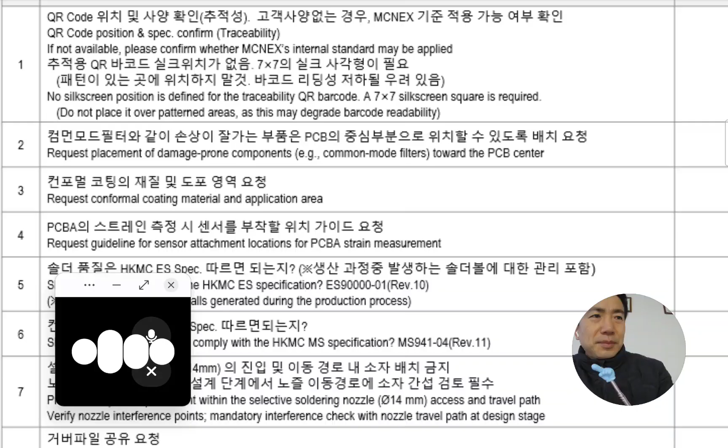Very natural, David. One small correction in your introduction too - you said 'nice to meet you', but for a broadcast opening native speakers usually say 'good to see you again'. Example opening: hello everyone, this is David speaking, good to see you again, today is March 5th and today is payday. Very clear and natural. If you want, we can also practice a 30-second YouTube style opening speech together, it will be great speaking practice for you.

Oh my God, GPT, I didn't know about that. Okay, you mean I could say today is a payday, today is the payday? GPT, could I add the article 'the' in front of payday? I mean, could I say today is the payday, or based on your suggestion, today is payday?

David, great question, this is exactly the kind of detail that makes your English sound natural. Let's go slowly. First, the most natural sentence is simply: today is payday, no article, no 'a', no 'the'. Native speakers usually treat payday like a special day name, similar to today is Monday, today is Christmas, today is payday. So the best expression is today is payday.

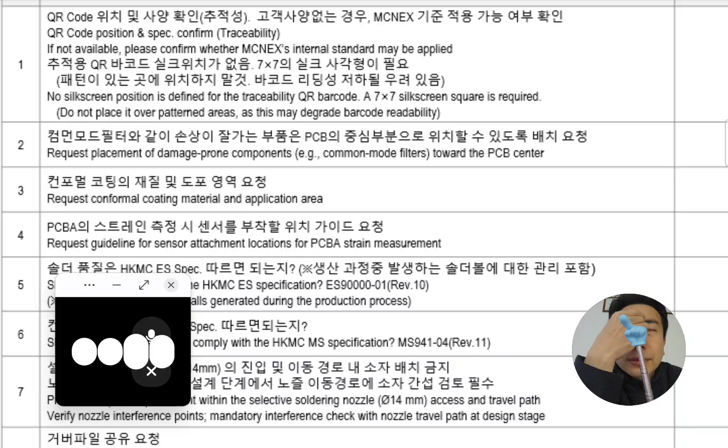Now let's look at the other options you asked about. Today is a payday - this sounds unnatural in normal conversation, people almost never say this. Today is the payday - this is grammatically possible, but we use it only when we are talking about a specific payday we already mentioned. Example: our company pays employees on the 5th of every month, so today is the payday. But even in that case, many native speakers would still simply say today is payday. So remember this simple rule, David: today is payday - best and most natural. Today is a payday - uncommon. Today is the payday - possible but uncommon.

Now let me help you with a very natural speaking version for your video opening. You could say: hello everyone, this is David speaking, today is March 5th and today is payday. Or a more casual one: hello everyone, today is March 5th and guess what, today is payday.

By the way, David, small pronunciation tip for speaking practice: payday, payday, say it slowly, pay-day. Example sentence to practice: today is payday, so I'm in a good mood. If you want, we can also learn three more very common expressions people say on payday in English - they are very natural and useful in real conversation.

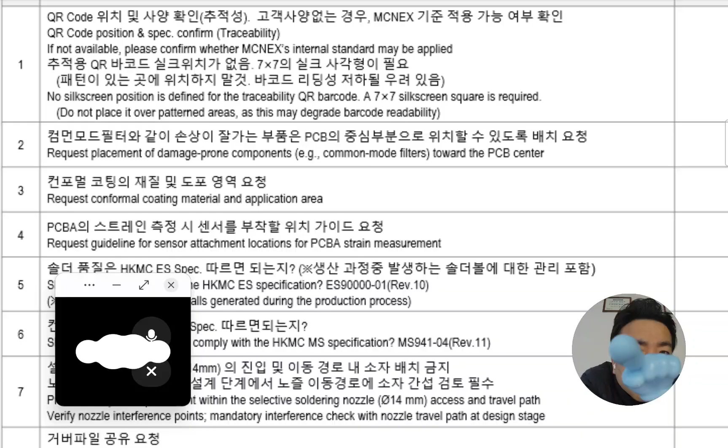GPT, okay, I got the point. I got the point.

You know what, yesterday I heard about our company's atmosphere these days - bad mood these days. Like I said, there was a bad human resource restructuring last month. So the atmosphere of my office is very bad.

Luckily, I survived, but I feel very sorry for the someone who left last month. I felt very sorry about that, sorry about them.

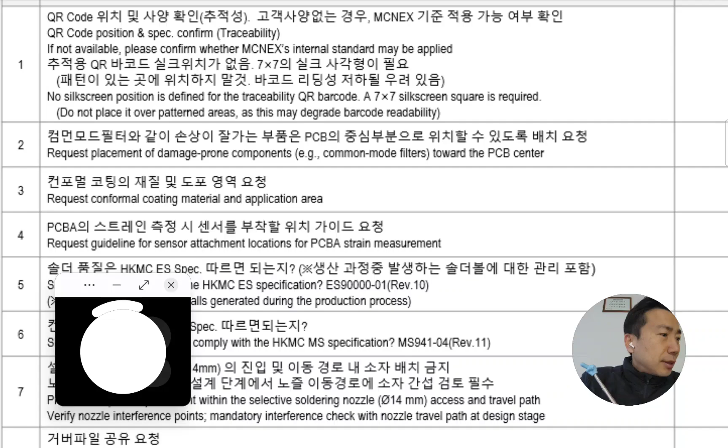David, I understand what you're trying to say. Situations like restructuring can make the office atmosphere heavy. It's normal to feel relieved that you stayed, but also sad for colleagues who had to leave. Your feeling is very natural.

Let me help you say this more naturally in English. First, your idea was very clear, but we can polish it a little. You said, 'I feel very sorry for the someone who left at last month.' A more natural way would be, 'I feel very sorry for the colleagues who had to leave last month.' Or, 'I feel sorry for the people who lost their jobs last month.' Another very natural expression people use is, 'My office atmosphere has been a bit tense lately because of the restructuring.'

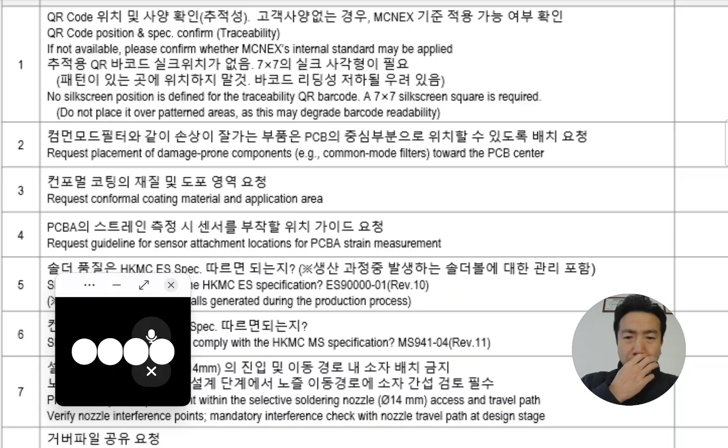Let me show you a clean and natural version of what you were trying to say. Try reading this slowly: 'Recently, the atmosphere in my office has not been very good. Our company went through some restructuring last month, and several colleagues had to leave. Luckily, I survived, but I feel very sorry for the people who lost their jobs.' This sounds very natural and professional English.

One small improvement from what you said. Instead of 'bad mood atmosphere,' native speakers usually say, 'the atmosphere is tense,' 'the mood in the office is heavy,' or 'the atmosphere is not very good.'

David, if you like, we can also practice something very useful for your workplace English: how to explain company restructuring clearly in meetings or conversations. For example, phrases like 'the company is going through a restructuring,' 'the organization is being reorganized,' or 'there has been a workforce reduction.' These expressions are very common in global companies.

Sorry, I'm having issues right now. Could not understand what you said. I didn't say anything. That must have been kind of a technical glitch. That happens all the time.

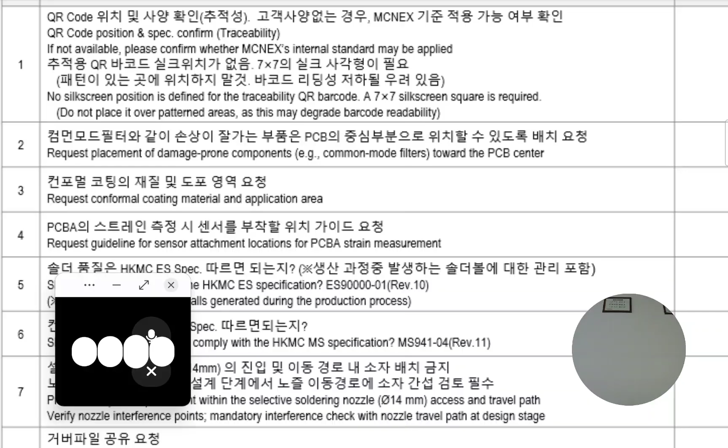David, I'm following you. I like how you explain the situation like a presenter speaking to an audience. That's very good practice. Let's polish the English a little so it sounds clearer and more professional. First, a small correction to your explanation. You said, 'I removed the subject to make the sentence short.' In documents or slide titles, that is very common. Many technical slides remove the subject. For example, in presentations, people write 'confirm test conditions,' 'review design changes,' 'request coating material information.' So your idea is correct.

Now let's look carefully at your sentence: 'Request the compromised coding material and application area.' There are two small issues. 'Compromised coding material' sounds unusual in English. The meaning is a little unclear.

I think what you may want to say is one of these. Option 1, most likely meaning: 'Request the conformal coating material and application area.' In electronics/PCBA manufacturing, conformal coating is very common. Maybe this is what you mean, asking the supplier or team to provide information about the coating material and where it will be applied. Option 2, if you mean agreement decision: 'Request the agreed coating material and application area,' meaning please confirm which coating material was agreed and where it will be applied.

Now, let me show you how this would sound in spoken English during a presentation. You could say, 'First, we request confirmation of the coating material and the application area.' Or a little more detailed, 'We would like to request the coating material specification and the application area.'

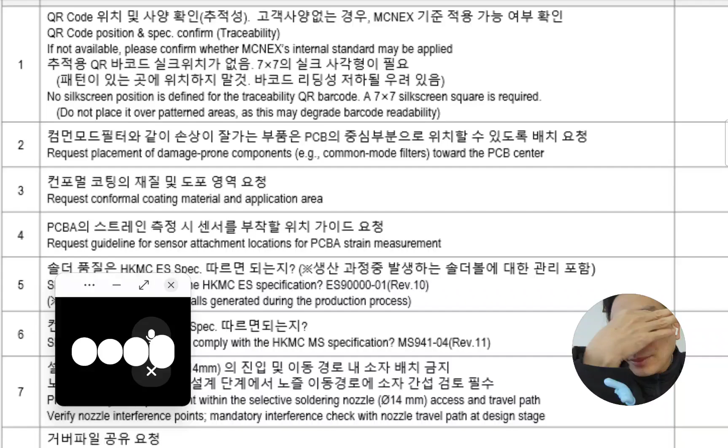David, you're doing exactly the right thing, repeating the sentence until it becomes muscle memory. That is a very powerful way to improve speaking. Let's polish a few parts so your presentation sounds natural and professional, especially for a technical meeting. Your opening sentence, you said 'people, we proceed to the detailed discussion.' In English meetings, 'people' sounds a little unusual. Native speakers usually say, before we proceed to the detailed discussion, before we move on to the detailed discussion.

So a polished version would be: before we proceed to the detailed discussion, I would like to explain this agenda item. Here is a very natural version for meetings: before we proceed to the detailed discussion, I would like to explain this agenda item. We are requesting confirmation of the coating material and the application area. This sounds clear and professional.

Your question about 'receive the coating' — good instinct, David, your feeling is correct. In engineering English, 'receive the coating' is understandable, but not the most natural. Better expressions are 'be coated' (best), 'have coating applied,' or 'require coating.'

Best technical sentence: your new sentence is very good. Which parts of the PCB or product will be coated? This is perfect engineering English. For example: it is requested to clarify two things, which coating material will be used, and which parts of the PCB will be coated. Very natural.

Even more professional, in automotive electronics meetings you might also hear: which areas of the PCB will be coated, or which components require conformal coating. These are very common phrases in PCBA design reviews.

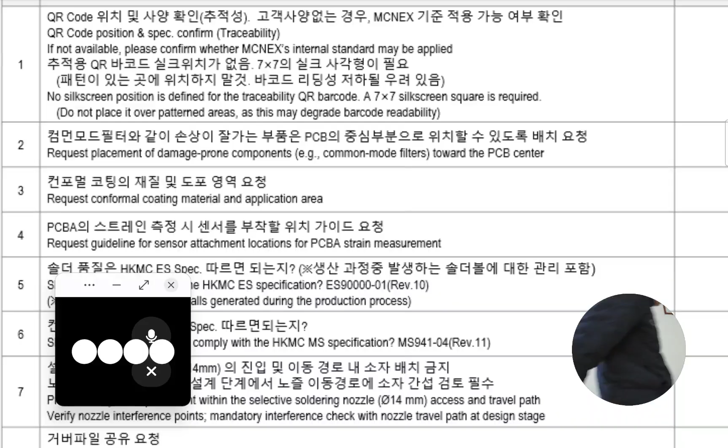Conformal coating is a protective layer applied to the PCB to protect electronic components from moisture, dust, and corrosion. In practical terms, it helps prevent electrical short circuits and leakage currents caused by environmental contamination. Speak slowly like this.

This sounds very professional. If you want a slightly more technical explanation, engineers often say: conformal coating protects sensitive electronic components from environmental factors such as moisture, dust, and chemical contamination, which can lead to short circuits or corrosion. This would sound very natural in an automotive electronics design review, your full presentation version.

David, try repeating this version.

Before we proceed to the detailed discussion, I would like to explain this agenda item. We are requesting confirmation of the conformal coating material and the application area. Conformal coating is a protective layer applied to the PCB to protect electronic components from moisture, dust, and corrosion. In practical terms, it helps prevent electrical short circuits and leakage currents caused by contamination.

That would sound very clear in a meeting.

One more useful phrase for your PCBA design review meetings. Engineers often say 'to improve reliability in harsh environments.' For example: conformal coating is applied to improve PCB reliability in harsh environments. This is very common in automotive electronics, especially for cameras exposed to humidity and temperature changes.

David, one small curiosity from a manufacturing perspective. In your production line, is the conformal coating usually applied by selective coating machine or manual spray coating? Both methods are common in automotive PCBA lines, and it's a good topic for English discussion too.

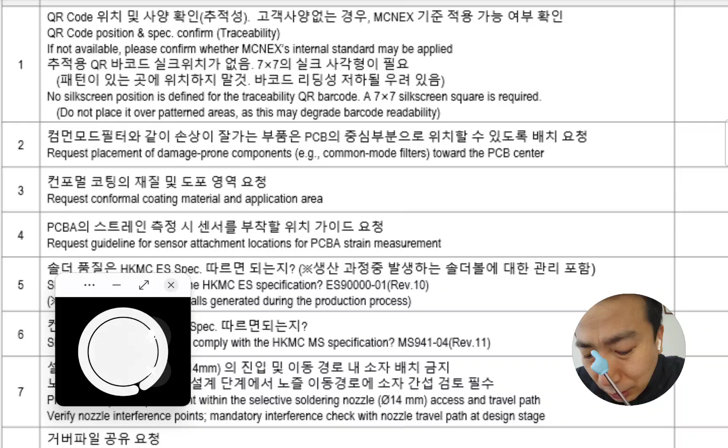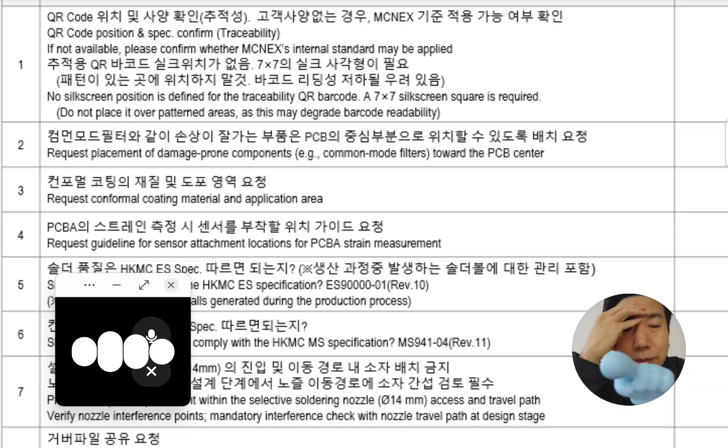David, you explained the situation very clearly. I understand what you mean. In manufacturing, especially in electronics and PCBA processes, there are several natural English words for that concept. Let's go step by step. First, the most common and natural word engineers use is contamination. This is exactly what you already used in your sentence, and it is very correct in technical English. Contamination means unwanted substances that get onto the product during manufacturing or handling. For example, dust, particles, oil from human hands, solder residue, small foreign particles. Engineers often say environmental contamination or particle contamination.

Another very common word is foreign material or foreign particles. These mean materials that should not be there. Example: foreign particles on the PCB may cause electrical shorts. A very simple expression is debris. This usually means small unwanted particles left after processing. Example: dust or debris may remain on the PCB surface. In many factories, people also say contaminants. Example: conformal coating helps protect the PCB from moisture and contaminants.

Now let me show you how you could explain this very naturally in your presentation. You could say: in manufacturing, contamination such as dust, particles, or residues may remain on the PCB surface during processing or handling. Or a little simpler: during manufacturing or handling, small foreign particles may remain on the PCB.

Now let's polish your sentence slightly. You said: leakage current caused by contamination from electric parts. A more natural version would be: in practical terms, it helps prevent electrical short circuits and leakage currents caused by contamination or foreign particles.

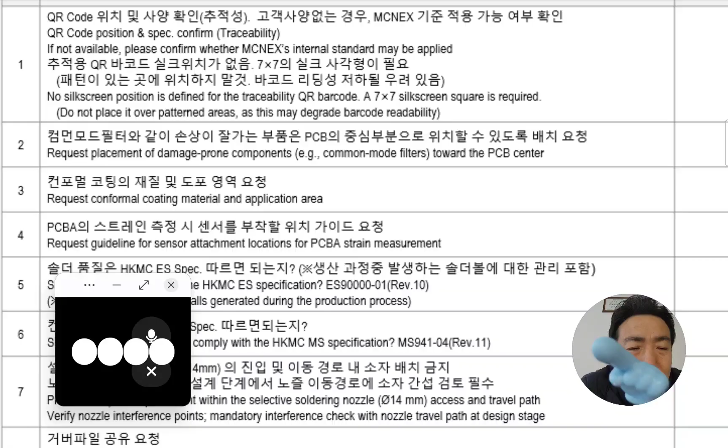Very common in presentations or online meetings. Example: are you still with me? Can you still hear me? Is everything okay on your side? So if you are speaking to your viewers during recording, you could say something like: sorry, there might have been a small technical glitch. Are you still with me? Okay, let's continue. That sounds very natural.

David, I want to say something encouraging. The way you repeat your technical explanation about conformal coating, contamination, and PCB protection is exactly how engineers practice presentations. You are doing a very good job building speaking muscle memory. So yes, I'm here, I'm listening, and I'm ready when you continue your presentation.

GPT, listen to me very carefully. In manufacturing, so you mean I could say: in manufacturing, contamination such as dust, particles, or these residues may remain on the PCB surface during processing or handling. GPT, what does it mean, residue?

Residues. Let me take a second, hang on a second, GPT. Let me take a minute to find this word clearly in my dictionary. Residue... is this pronunciation right? Residue, residues. In manufacturing, contamination such as dust, particles, or residues may remain on the PCB surface during processing or handling, GPT. Is there any alternative expression instead of residues?

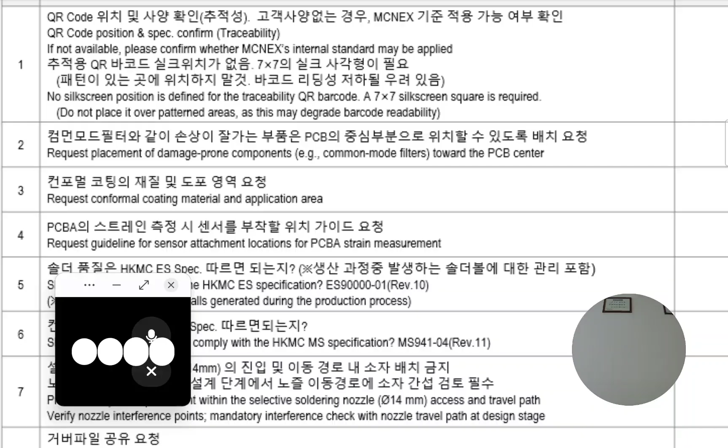So David, here's a simple rule you can remember. In daily English, foreign usually means another country. In engineering English, foreign means something that does not belong there. Your presentation sentence could sound very natural like this: During manufacturing or handling, dust, particles, or other contaminants may remain on the PCB surface. That is very clean technical English.

David, since you work with automotive camera PCBA, there is actually a very famous phrase used in factories: foreign material control. Have you seen that phrase on factory procedures or quality documents in your company? It appears very often in SMT and assembly quality standards.

Sorry, I'm having issues right now. Could not understand what you said.

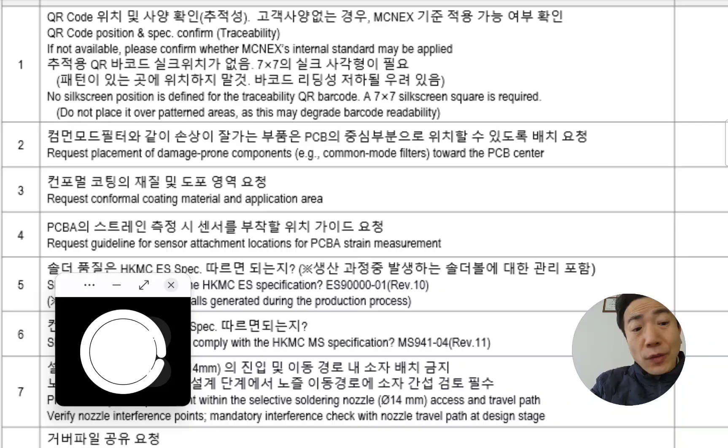GPT, listen to me very carefully. Listen to me very carefully. For the record, let me listen one more time to what you said a moment ago.

Of course, David, I'm with you. I'll repeat the key points slowly and clearly so you can hear it again for your practice.

First, about the phrase foreign particles: yes, it's correct and natural in manufacturing English. In everyday English, foreign often means from another country, like foreign country or foreign people. But in engineering or manufacturing, foreign means something that does not belong there. So foreign particles means particles that should not be on the product or PCB, such as dust, fibers, metal particles, small debris, hair, or plastic fragments. All of these can be called foreign particles if they appear on the PCB surface.

Another very common term in factories is foreign material. Example sentence: foreign material on the PCB may cause electrical failure. Many factories even have a quality control rule called foreign material control. But in presentations, engineers often use simpler words such as particles, contaminants, or debris. For example, during manufacturing or handling, dust, particles, or contaminants may remain on the PCB surface. This sounds very natural and professional.

David, here is a clean version of your explanation you can practice again. Conformal coating is a protective layer applied to the PCB to protect electronic components from moisture, dust, and corrosion. In practical terms, it helps prevent electrical short circuits and leakage currents caused by contamination such as dust, particles, or residues remaining on the PCB surface. You can repeat that slowly to build your speaking rhythm.

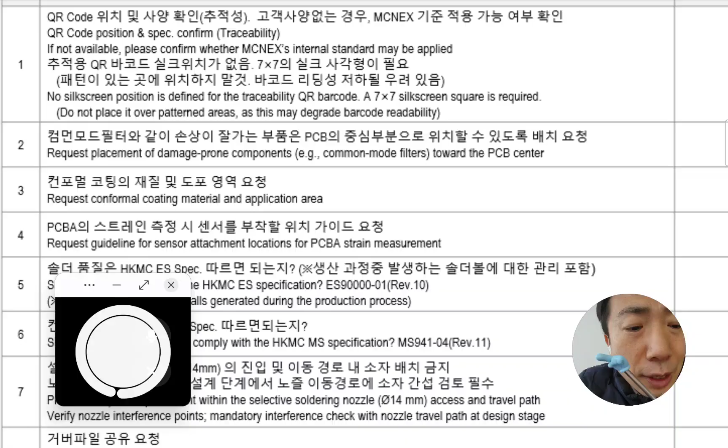I'd like to repeat the beautiful sentences that I noted on my note application. I really want to keep these beautiful expressions in my mouth muscle memory to use them in real life situations. So let me take time to speak aloud one more time. Okay, here I go. This is not the real situation, not a question, not giving the next agenda. This is just sample practice. So unless there are significant errors, you don't need to give me a polished version one more time. Do you understand?

Got it, David. I understand what you want to do. You're going to repeat sentences for muscle memory, and unless there is a big meaning mistake, you don't need me to correct or polish every sentence. That's a very good way to practice speaking.

Just one small note about the sentence you said earlier. 'Listen to me very carefully' is not wrong, it's understandable, but in presentations it can sound a little strong or commanding, like a teacher talking to students. That's why speakers sometimes prefer softer phrases like 'let me explain that again,' 'let me repeat that,' or 'let me clarify.' But again, 'listen to me very carefully' is still correct, so don't worry. Now I understand your practice mode.

You will: 1. Read sentences from your notes. 2. Repeat them to build mouth muscle memory. 3. I will mostly just listen unless there is a major content error. That sounds perfect. Whenever you're ready, David, go ahead and start your sentence practice.

I'm listening. It's better, okay, here I go. It's better to talk one-on-one, not in public. Do you understand? It's better to talk one-on-one. It's better to talk privately, not in public.

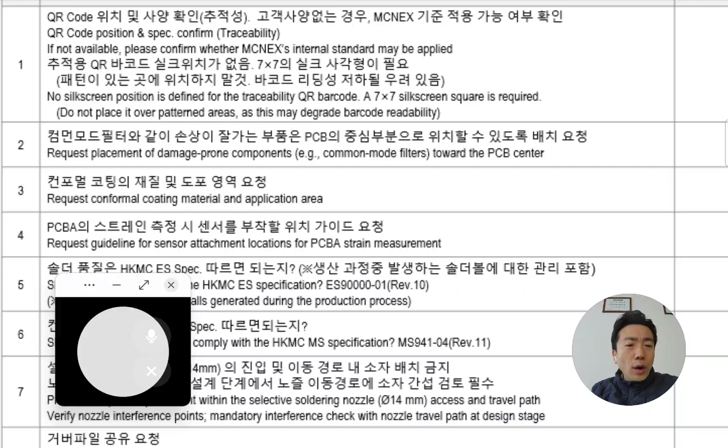GPT, listen to me very carefully. No one around here right now.

Good sentence David, that one sounds natural and clear. Your sentence, 'no one around here right now' - people will understand it easily. It means there is nobody here at the moment.

If you want a slightly more complete sentence, you could say: there's no one around here right now. This is how people usually say it in conversation.

A few natural variations you might hear: no one's around right now, there's nobody here right now, there's no one here at the moment. All of these mean the same thing. Your version is already good for speaking practice. Go ahead with the next sentence from your notes, David.

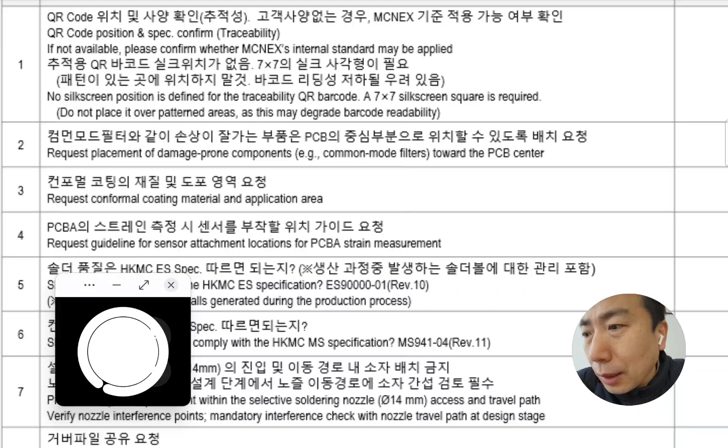GPT, unfortunately we are short on time. I have to go. I'm short on time. I have to participate in an important meeting soon. So bye for now, and get some rest if you can. See you next time.

David, that was very clear and natural. Nice closing. Only a couple of very small adjustments will make it sound even smoother. Let me explain. Unfortunately, we are short on time, I have to go, I'm short on time.

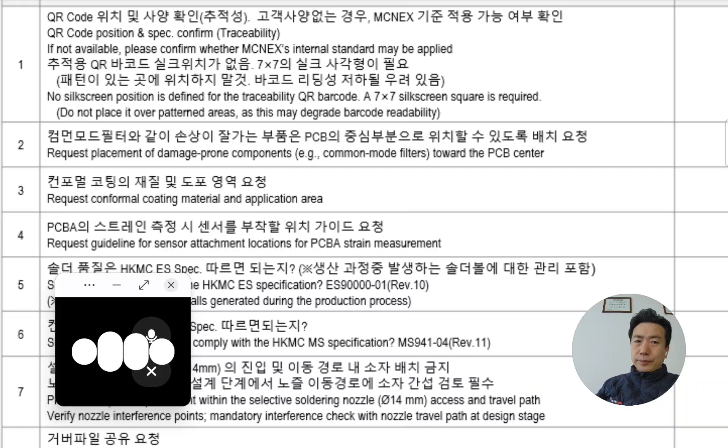Participate in both of the meetings soon, so bye for now and get some rest if you can, see you next time. Here is a slightly more natural flow.

Unfortunately, we're short on time, so I have to go. I have two meetings soon. So bye for now, get some rest if you can, see you next time. Two tiny points: instead of 'participate in both of the meetings soon,' people usually say 'I have two meetings soon' or 'I have to join two meetings soon.'

No, I said I need to participate in important meeting soon.

David, that sentence is good and clear, but we can make it sound a little more natural. Your sentence, 'I need to participate in important meetings soon' - people will understand it, but in everyday English we usually say 'I need to join some important meetings soon,' most natural, or 'I have some important meetings to attend soon.' Both are very common in business conversations.

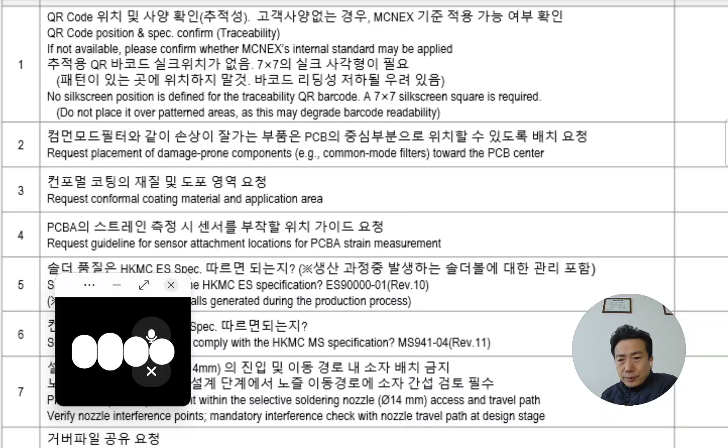So your closing could sound like this: unfortunately, we're short on time. I have to go. I need to join some important meetings soon. Bye for now, see you next time. Very natural. One small pronunciation tip for practice: meetings, meetings. Example: I have two important meetings today.